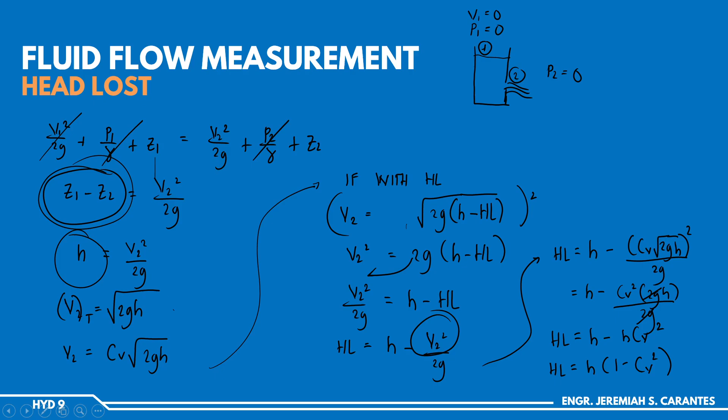So that's it. To get the actual velocity, our CV is the actual velocity divided by the theoretical velocity. If you want to get the actual velocity, just cross multiply - that's CV times V sub t. So our actual velocity formula is just the theoretical formula multiplied by its coefficient.

And for theoretical discharge, this formula came from A times V. If you want theoretical discharge, you use theoretical area and theoretical velocity. The theoretical area we're referring to here is the area of the orifice itself, from the formula of coefficient of contraction.

And for actual discharge, let's repeat: Q equals AV. So if all of these are theoretical, but you want to make your discharge actual, the theoretical area and velocity you use need to become actual as well. So for our conversion, in the coefficient of contraction, this is the area at the vena contracta divided by the area of the orifice. So our actual area there is the area itself at the vena contracta - that's CC times A at the orifice.

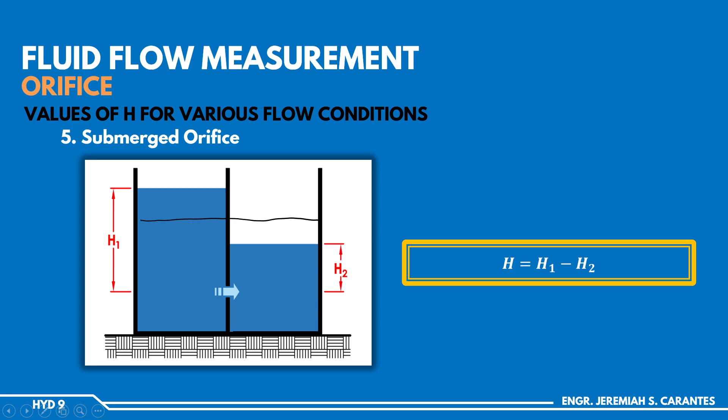I hope nakikita yung pinagkaiba nila. Nauna lang kumbaga etong term na to, that's the second formula natin. Yun, nandito kasi, yung ating acceleration in terms of the gravity siya. So ang mangyayari, yung a natin dyan papalitan lang natin ng negative g, kaya naging ganun yung itsura ng formula natin sa previous slide.

Okay, so yung pangatlo naman, vf squared equals v1 squared minus 2gy. Saan ba nanggaling ito? Patingnan na lang din natin.

Ulitin natin, when we say acceleration, this is dv over dt. Etong si dv natin, that's the change in velocity. Pag change naman, pwede mo sabihin na siya ay difference ni final value minus the initial value. So this is final velocity minus initial velocity divided by the time elapsed. Ilagay ko na lang dito t. Mula dito, pwede natin i-rewrite ito in terms of t, so si t ngayon equal siya kay vf minus vo divided by a.

Ngayon etong formula na yan, i-su-substitute natin dun sa formula na, saan ba? Eto. Si v, i-rewrite ko etong part na to, lagay ko dito. So we have vf or v final equal siya kay vo plus at.

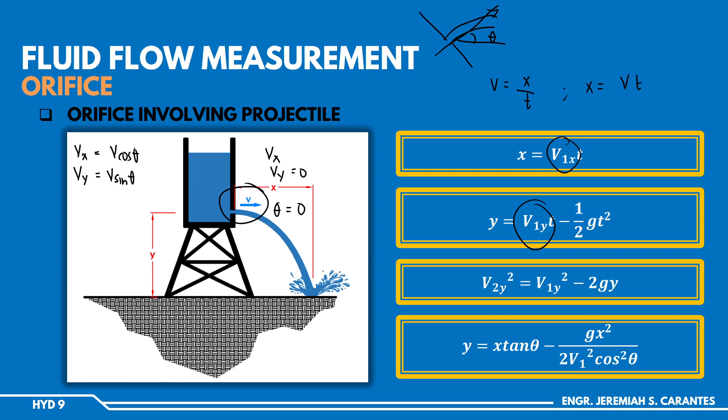Tapos yung nandito is in terms of y. So lagay natin yung kung anong component sila. Eto siya ay Vx, ito naman siya ay Vy, so ito ay Vx. Okay?

Sabi natin, getting the component ng ating velocity. Si Vx, pwede mo siyang isulat as the original velocity, the original na total velocity, cosine theta. At saka yung Vy dyan, that's V sin theta. Palitan natin, si Vy, that's V sin theta. Tapos yung T natin, ito siya.

X over V cosine theta, minus 1/2 times G. Tapos yung T natin is the square of this one, times x over v cosine theta na naka-squared.

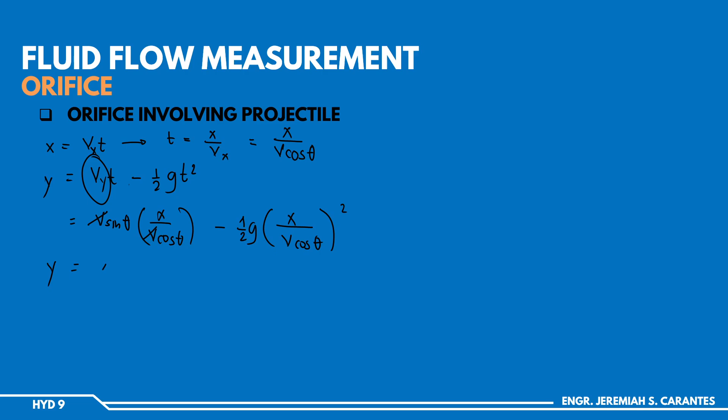So if you simplify this, magka-cancel si v. Ang matitira, x sa taas times sine over cos. Si sine over cos, that's tangent, di ba? Pwede mong i-rewrite yung first term as x tan theta. Minus, dito pwede mong distribute yung exponent kay numerator and denominator. Ang mangyayari, meron kang 1/2 g x squared over v squared cosine squared theta.

So if we simplify it once again, this is x tan theta. Sa taas, meron kang gx squared. Sa ilalim, meron kang 2 v squared cosine squared theta. So ito naman yung ating pang-apat na formula.

So ito kasi ginagamit primarily to express yung relationship ng x and y dito sa ating figure, along with the angle ng ating projectile. So that's our formulas pagdating kay orifice involving projectile.

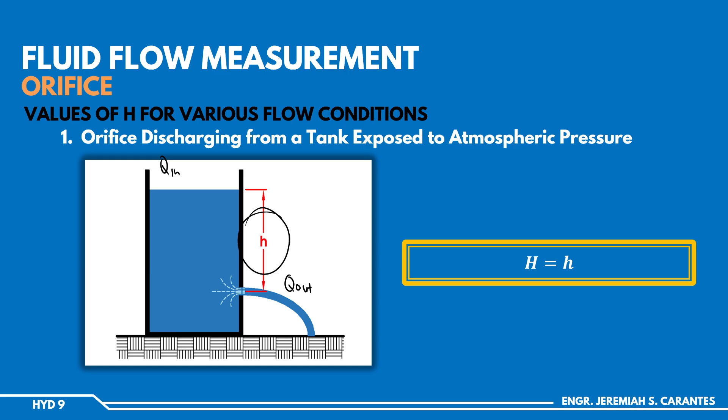That means even though it's being reduced at the orifice, there's a constant inflow of water to maintain that constant H. That's constant head. However, when there's no Q in, the head is no longer constant because it keeps decreasing. That's our case for orifice with falling head. The flow through orifice, weirs, nozzles, or tube is considered steady when the total head producing the flow, H, remains constant with time - it doesn't get reduced. Although some is being reduced, it's immediately replaced, so H remains constant. But under this condition, the discharge Q is also constant.

And the volume of fluid discharged over a given time interval T may be expressed as this. This is our original formula for Q, right? We said Q equals V over t. Let's express it as volume equals the product of Q times T.

However, in many practical situations, our head changes during outflow. This variation in head results in a corresponding change in discharge, thereby producing an unsteady flow condition. When the head is larger, the flow is stronger - similar to a jug of water. When the jug is full, the water comes out of the spout with more force, but when there's only a little left, the water comes out weaker because the head is lower. Remember, head is what causes the flow.

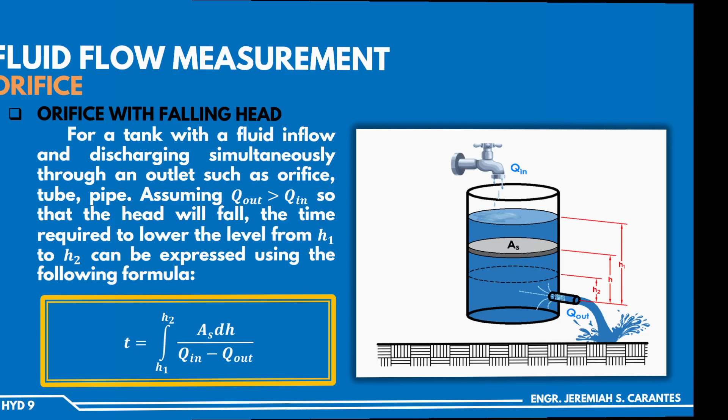So for orifice with falling head, the common question is the time to empty a tank. Here we have a cylindrical tank with a Q in and a Q out, but let's say the Q out is greater - meaning more water is leaving than entering. So eventually the tank will empty because more is flowing out. To get the time to reduce the initial head - from the original water surface to the center of the orifice, that's H1 - if we want to lower it from H1 to H2, meaning down to this water level, this is the required formula for that type.

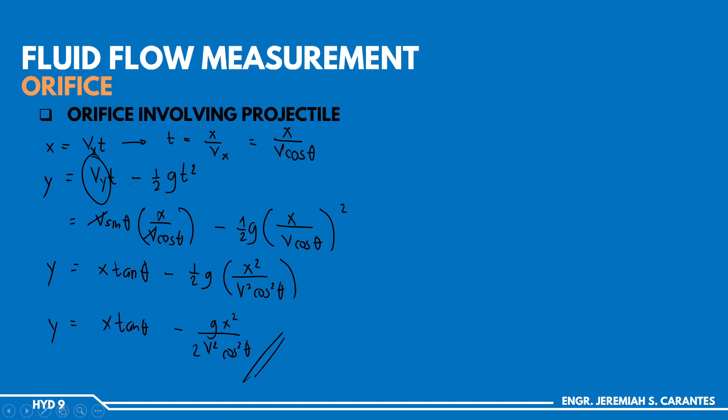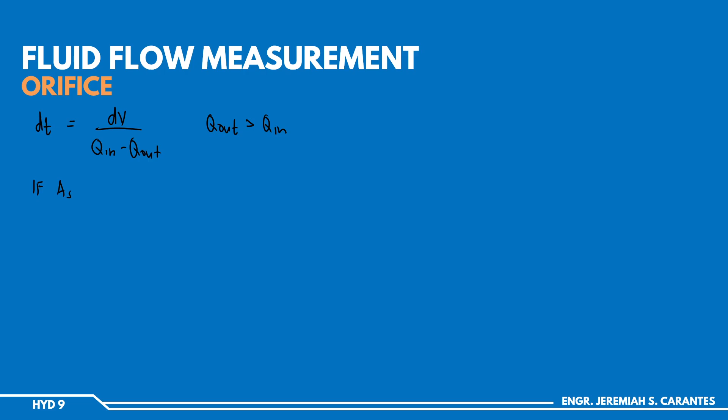Now suppose we are trying to drain. If we want to drain, the Q out must be greater than Q in. So assuming that AS is constant - the AS we're referring to here is the area, or the surface area of the fluid surface itself. In our figure earlier, this is our AS.

For this case, let's say our tank is cylindrical, so the area of its base is constant. Since the volume changes, and if you consider a constant area, what changes here is just the height of the water. That means dV, if AS is constant, we can express it as a constant area times the changing height of the water. So let's substitute that, then we copy the Q in minus Q out.

So dito, to get the time, syempre kailangan mong integrate. Integral ng dt, yan ay magiging t. Ngayon dito, ang nagbabago, take note, is the h. Si AS ay constant, kasi in-assume natin siya to be constant. So since h yung ating operator, dapat yung upper and lower limit mo is in terms of h. Ang ilalagay natin sa lower limit is yung initial na height, dun sa figure h1, ang final height natin is h2. Then copy AS dH over Q in minus Q out. So ito yung ating general na equation for the time to lower the head from H1 to H2.

So let's try to modify this, kasi hindi naman yan madalas yung ginagamit na actual na formula natin. So let's say, from this equation ng T, let's assume na walang pumapasok, constant na outflow lang. So if Q in is 0, ang ating equation pwede natin sabihin equal lang siya kay integral ng, so from H1 to H2, AS dH divided by 0 minus Q out. So negative Q out na lang, or yung negative dyan pwede mong ilagay dito sa unahan.

As you can remember, one of the rules ng integral, if you interchange yung upper and lower limit, mag-change din ng sign yung ating integrand. So ito yung integrand natin. Ibig sabihin nun, kung pagpapalitin mo yung upper and lower limit, let's say from H2 to H1. Dito kasi sa ating figure, di ba, mas malaki si H1 kesa kay H2. Usually naman ang upper limit natin, mas malaki ang value kay lower limit dapat. Dito kasi sa equation na to, in-express natin siya in terms of the initial and final height ng tubig. Pero kung inayos natin dito, mawawala lang naman yung negative, pero AS dH over Q out na siya.

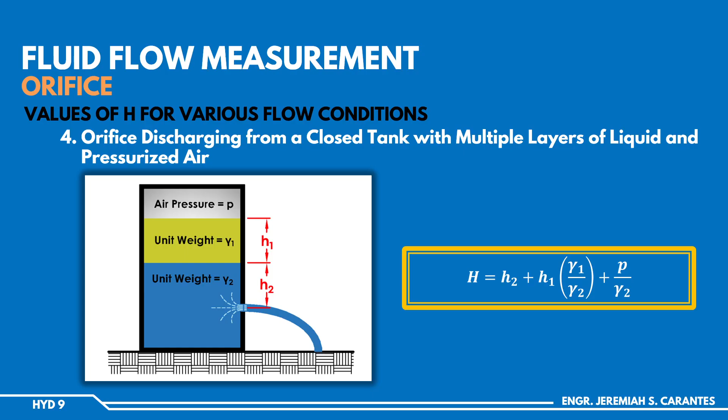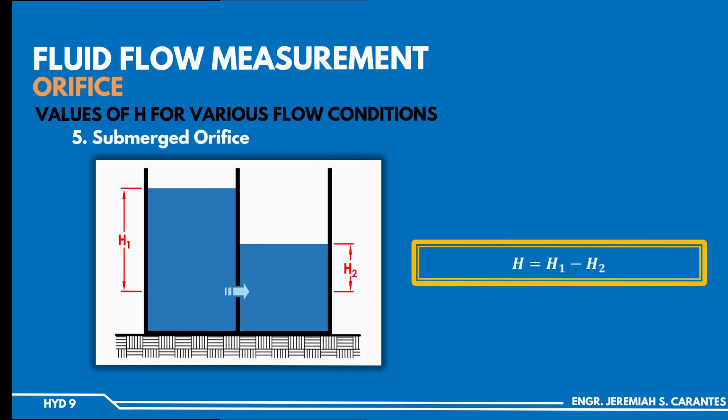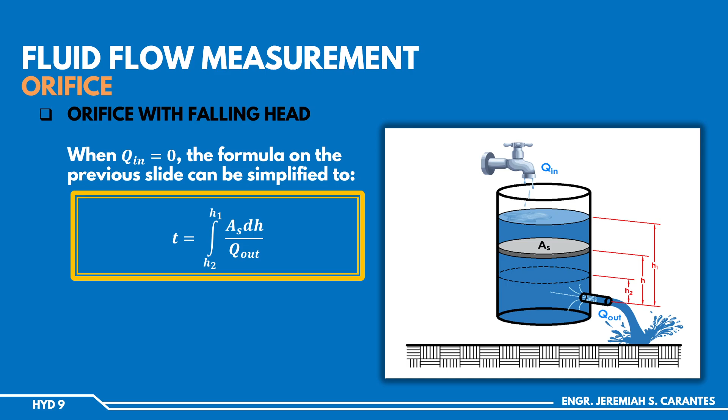So eto na ngayon yung ating direct na formula in finding the time. Kung ayaw nyo nang mag-integral, pwedeng eto na lang ang kabisaduhin natin. Yang mga formula na yan naman yung mga nandito sa mga susunod natin. So ito kapag in-assume mo na 0 yung Q in, eto yung ating derived formula.

Eto yung hindi pa na-integrate. Ito naman kapag na-integrate na. Now take note, this formula is only applicable kapag constant yung AS mo, tulad dito sa ating figure.

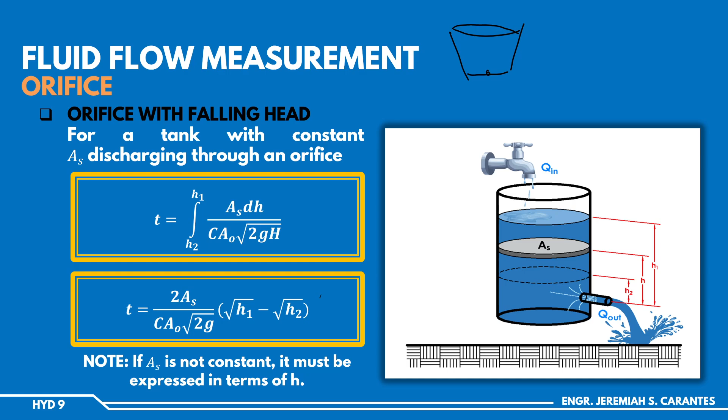Pero kung hindi man constant yung AS, kailangan mong bumalik dito sa formula na mag-i-integral ka muna. Ang gagawin mo diyan, yung AS na 'to kailangan mo siyang express in terms of H. For example, ganito ang itsura ng orifice mo, kasi meron kang frustum of a cone, tapos ang orifice mo nandito sa ilalim. So ito yung outflow. Hindi constant yung cross-sectional area, kaya yung AS kailangan mong express in terms of H kasi nagba-vary siya. So that's the formula for orifice with falling head.

Another is we have orifice with falling head pero meron tayong submerged orifice o connecting tube naman. Dito same derivation actually dun sa ating nauna kanina. Kaya nga lang dito, since hindi na magkaparehas yung AS1, meron tayong dalawang tank, so hindi magkaparehas yung kanilang surface area. Now, ang gagawin natin dito, saan ba nanggaling yung formula na yan?

So it came from T is equal to integral, T is equal to integral from H2 to H1 of AS dH over Q out. So eto yung nandun kay previous na derivation natin.

So ang gagawin lang natin kasi, since etong AS hindi na lang siya iisa, and etong si DH also, kailangan natin siya express in terms of the change in height ng dalawang tank natin. Dito, yung DH natin, pwede natin tong express as D, change in height dun sa ating tank 1 plus the change in height dun sa ating tank 2.

So saan ba natin to makukuha? For example, eto, sa tank 1 natin, eto yung kailangan ibaba ng height. Ito mismo, ito yung ating DH1. While ito naman, ito yung ating DH2, kasi kung ano man yung ibinaba dyan, yun din naman yung aakyat dito sa kabila. So, as you can see, etong buong height na to, equal siya dun sa buong height na yan.

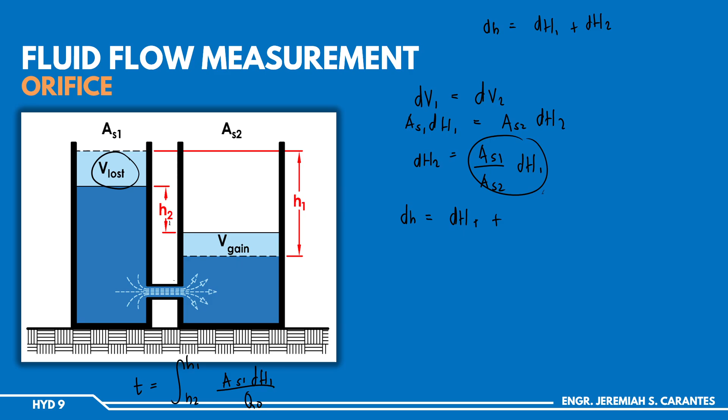So we have DH is equal to DH1 plus yung DH2 natin, ito na lang ang gagamitin ko, that's AS1 over AS2 times DH1. Parehas na silang in terms of DH1.

Pwede natin i-factor out ngayon itong DH1. Si DH, pwede natin siyang i-rewrite in terms of quantity ni 1. Pag pinactor out mo yung DH1 sa first term, 1 na lang. Pag pinactor out mo yung DH1 dito sa second term, may matitirang AS1 over AS2, multiplied ng ating finactor out na DH1. So this is our equation for DH.

Rewriting, ang kailangan natin, remember, is DH1 dyan. Si DH1 from here, simplify muna natin yung nasa loob ng parenthesis. Yung nasa loob ng parenthesis, we can rewrite it as AS2 plus AS1 divided by AS2, times DH1.

Parang yung process natin ng pag-add ng fraction lang. So butterfly, cross multiply plus cross multiply times the product ng denominator. Ito yan. To get the DH1 in terms of DH, etong si AS2 cross multiply kay DH, tapos yung nasa taas, cross divide naman kay DH.

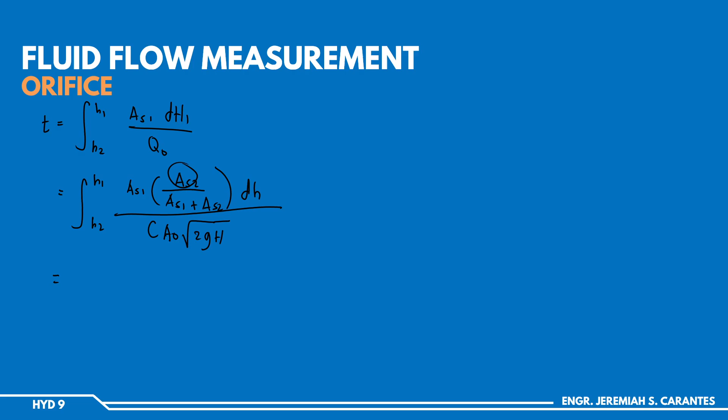Yun ulit yung C, area ng orifice, is square root of 2GH. Now, assuming na lahat ng area, si C, si AO, tapos si G ay constant, pwede mo silang ilabas lahat. Pag nilabas mo lahat, nandito sa unahan na, product ng AS1, AS2. Lagay ko sa taas, AS1 times AS2, divided by yung sum nila, AS1 plus AS2, divided by C, AO.

Square root of 2G. Ang matitira lang sa loob, H1, H2 na limit, dH over square root of H. Yung pinag-integrate natin kanina, ito pwede nating i-rewrite as H raised to negative 1/2 dH. Pag i-evaluate natin yan, ito yung square root of H1 minus square root of H2.

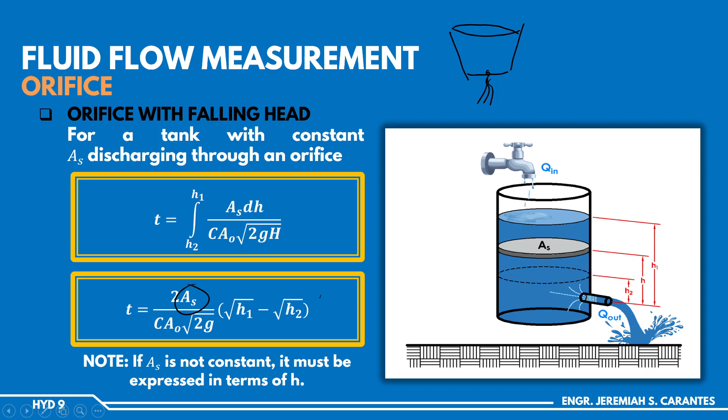Kamukha siya nung isang formula ng time natin, kaya nga lang ito kasi ay AS lang. Ito yung formula, diba? AS lang yun nandito. Pero dito naman ay ganito na siya.

Nakalimutan natin ilagay yung times 2 doon. Pag in-integrate nyo si H1 over H2, yan ay 2 square root of H1 minus square root of H2, kaya merong 2 dun sa unahan.

Burahin ko lang, then rewrite natin finally. Yung ating T equal siya kay 2 times, itong nakabilog na yan, AS1 AS2 over AS1 plus AS2, times, naka-divide siya, pwede natin siyang i-rewrite as 1 over C, area ng orifice, square root of 2G, times, yung integral niyan, that's 2 times square root of H1 minus square root of H2.

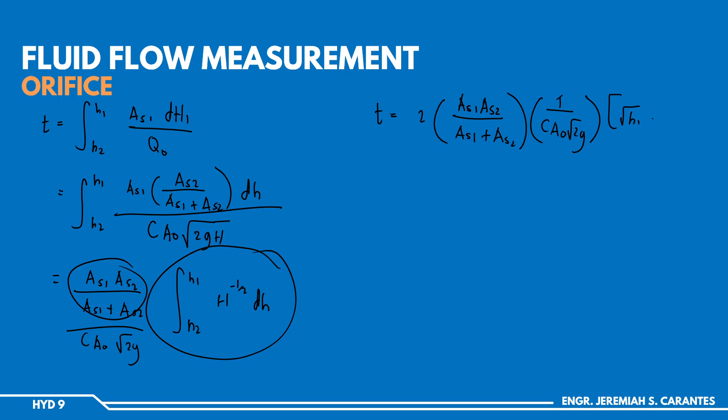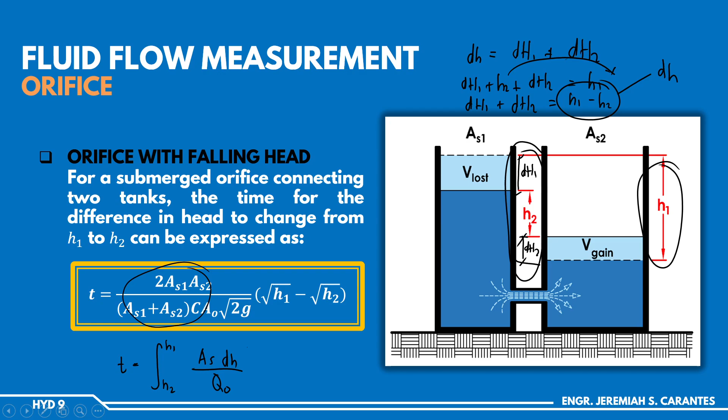Ito na ngayon yung formula natin kapag ganito yung itsura ng orifice. Okay, so that's our formula. Let me stop this muna para hindi masyadong mahaba ang video.